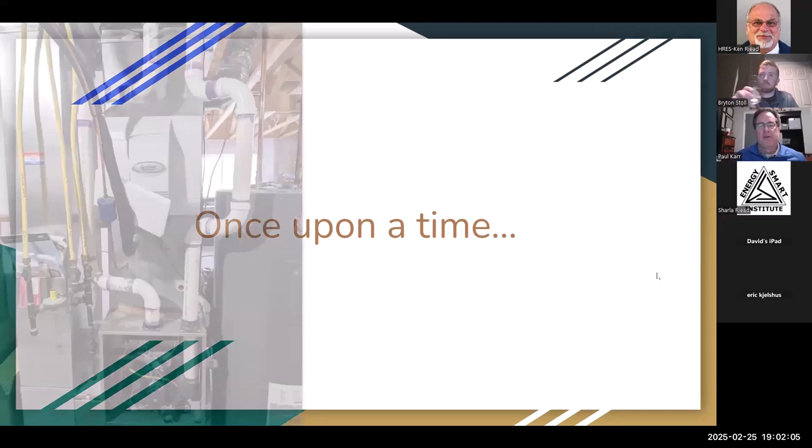So remember the TV show Lost? The survivors had to go and press the reset button right on time, or else the end of the world would come. And so I was like the guy on Lost. I had to go to the basement and kept hitting the reset button to keep the unit running over the winter. And I've got a little video here of the burner firing, so it would fire up nicely, nice blue flame there.

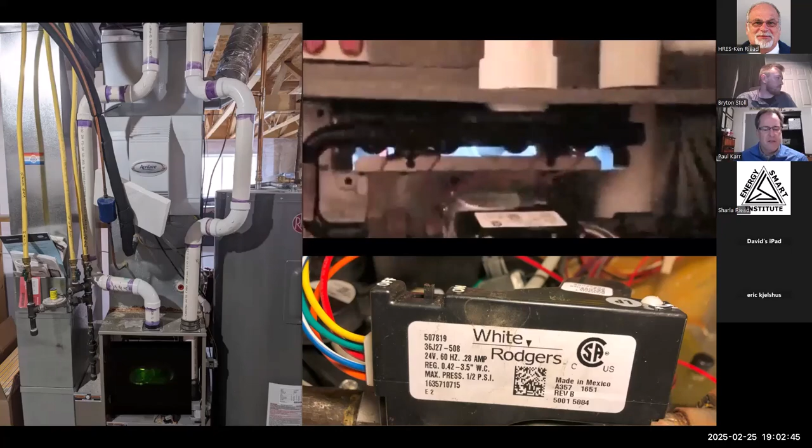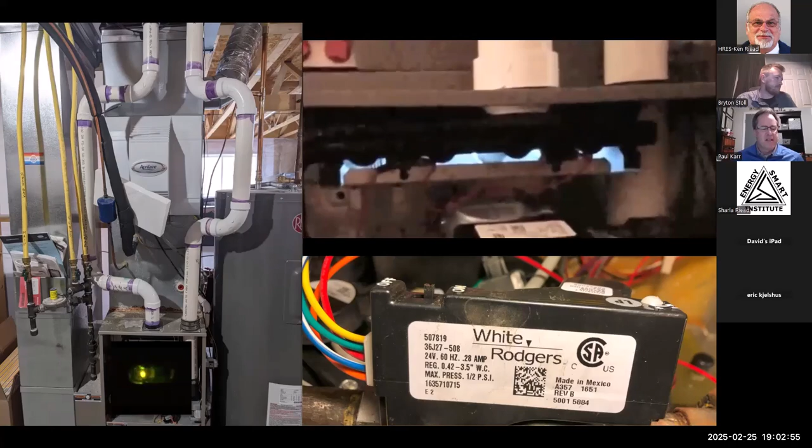I'd call the HVAC technician to come out and take a look at it, and his diagnosis was the modulating gas valve on this brand is well known to be a piece of crap. And you can't really replace it. You need to replace the whole system, and that'll cost you about $12,000. And so that was a shock to the system.

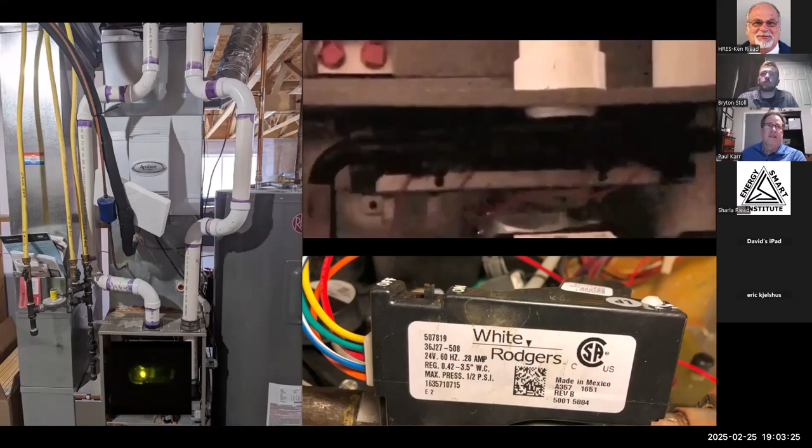And maybe some of you have heard that from a tech before, and you don't know if you can believe them or not. Are they just trying to sell me equipment, or could I actually call someone else out here? Maybe they could fix it. I don't know. But that was way more than I expected. So here you're going to see where the fan turns off and the flame rolls out, then it kicks off. And so that was doing this quite frequently throughout the winter.

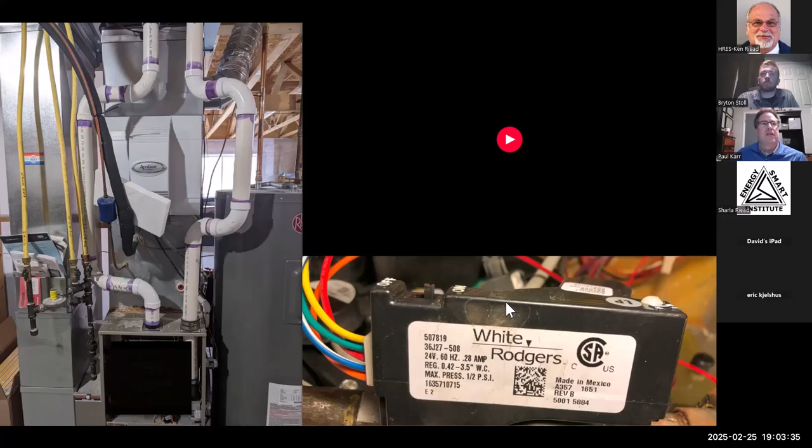So I knew that I didn't want to spend $12,000 on a new system that was just the same as what was coming out. So I thought maybe it was an opportunity to put in something better. In the summers, we had been experiencing really high electric bills, like over $400 to cool the house. And we had become friends with one of the neighbors, the owner of the propane company. We were friends, but still calling him to come refill our propane tank for over $1,000 was always a traumatic experience.

So I asked the first guy, what would it cost to put in a heat pump? And his answer was, oh, I wouldn't do that. He said, heat pumps can't handle our Kansas winters. You'll be calling me in 9 months complaining that it's just too cold. So I said, humor me. So he checked with his supplier because he didn't even know what it was going to cost. And he reluctantly came back with a quote of $22,000.

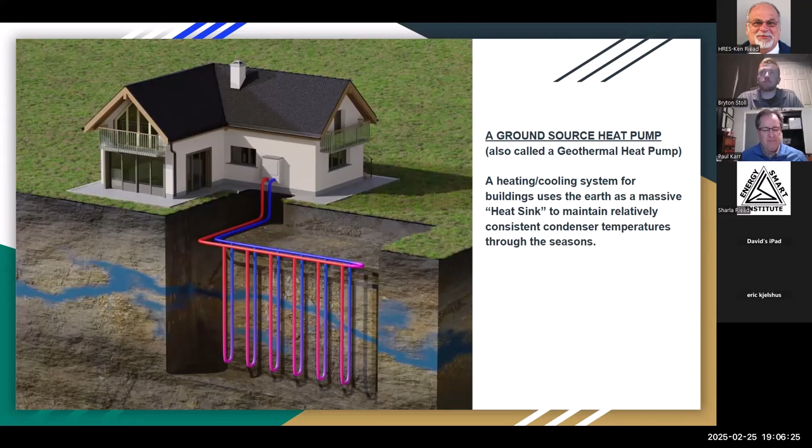So we decided to do that. And we called them out and got on the schedule. Had to wait months for this to happen because they were high in demand. And you have to wait on the weather too. So rainy spring season's not a good time because they got to pull this huge rig out into your yard.

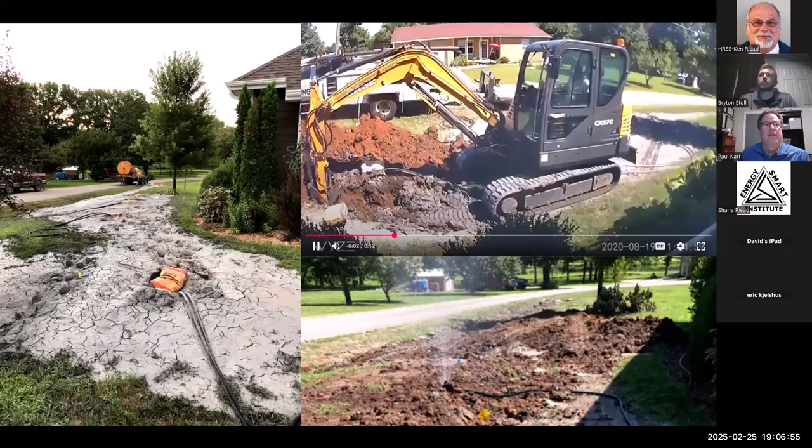And they drilled four wells to the side of the house here. And talk about destroying the yard. They definitely did do that. So I had expected that I would just clean up the mess with my hand shovel, but no, it ended up being a lot worse than I thought. But there you can see on the left-hand picture the four yellow bags. Those were the tops of the four wells that they drilled.

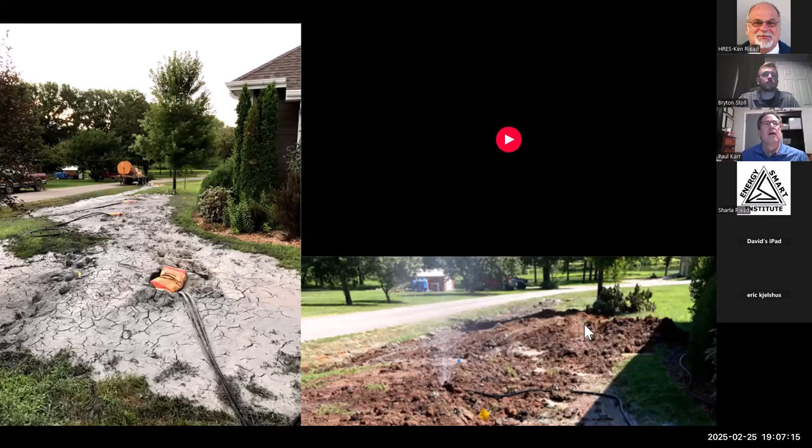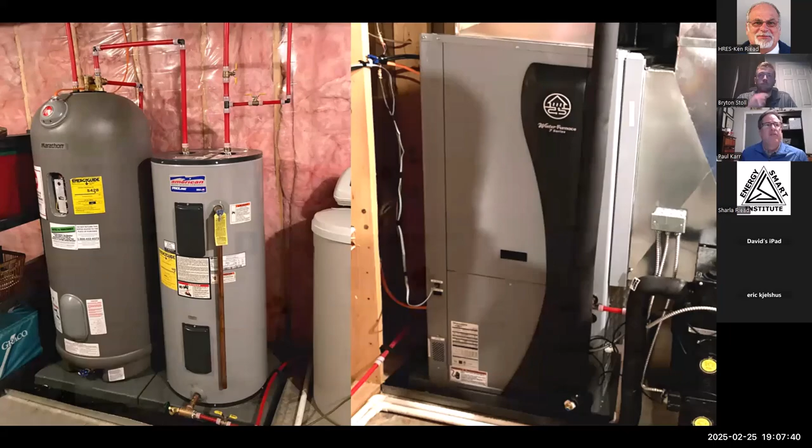And before we knew it, we had our beautiful new WaterFurnace system in the basement, took the place of the furnace, and the little side desuperheater, the heating the hot water on the side, and a new electric tank. And we got it put in. I was very proud of this. Now, we never really saw an electric bill as low as $35, unfortunately, maybe $100. But I still have the inner satisfaction that we made a smart decision.

Now, this screen here is pretty interesting. This was how the system looked. Let me turn on my pen here. So this was, we'd gotten the system put in the fall, and this screenshot was taken on February 16th, and I was worried because this loop temperature throughout the winter had been dropping. It started around in the 50s, but the loop temperature is what the temperature of the loop down in the earth is on those 200-foot wells, and that temperature kept dropping and dropping. And I was worried that at some point we were going to reach freezing.

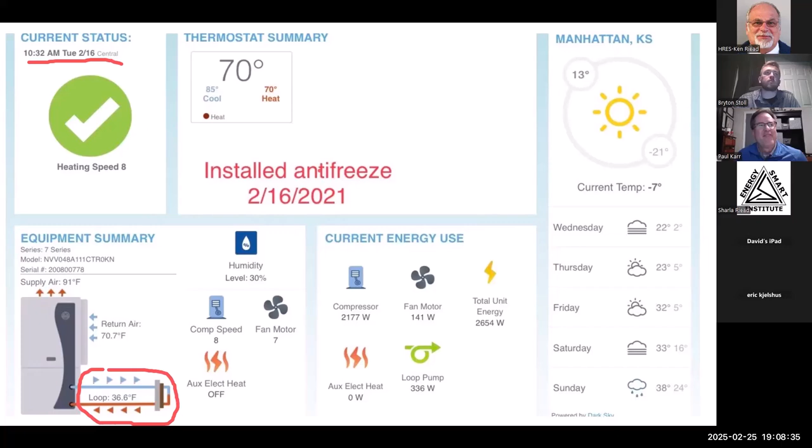And so I had called the installer, and he goes, "Oh, we'll put antifreeze in it. Don't worry, we'll get out there and do it." And they finally came out and did it in February. So that's what this note was. But they installed the antifreeze on February 16th, and this loop temperature never got below freezing.

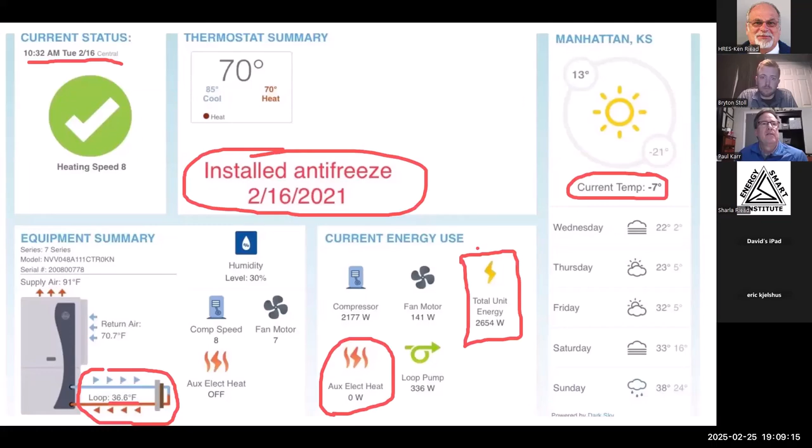Some other interesting things. It was -7 degrees out the day that I took this screenshot. And the electric auxiliary heat never kicked on because the loop temperature was still able to use the heat pump at 36.6 degrees. The total energy being drawn at the moment I took the snapshot was 2,600 watts, which is about 11 amps. So definitely a great energy saver. We're able to heat the house on 11 amps basically at this moment. So that was pretty neat. We were pretty excited about that.

Let's see, how do I turn this off?

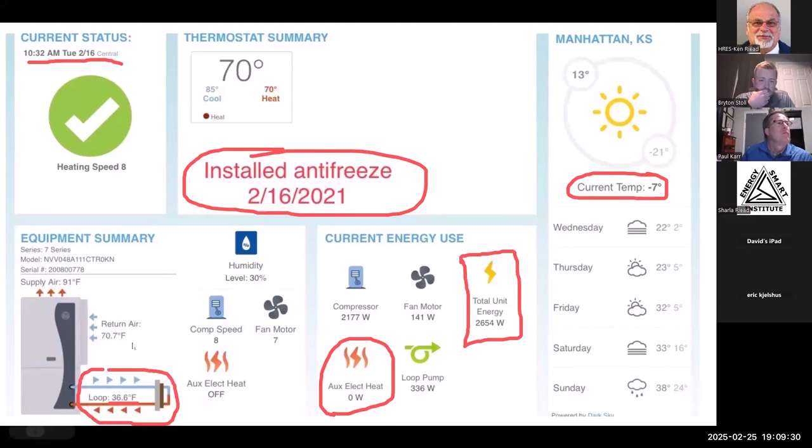So some things I learned from this experience. First, the expected energy savings really was an educated guess based on what my cousin had told me. In hindsight, I should have found an energy auditor to perform the energy model with accurate energy savings predictions and not just rely on anecdotal evidence. So that was one thing I learned. But at the time, I didn't really know anything about energy auditors.

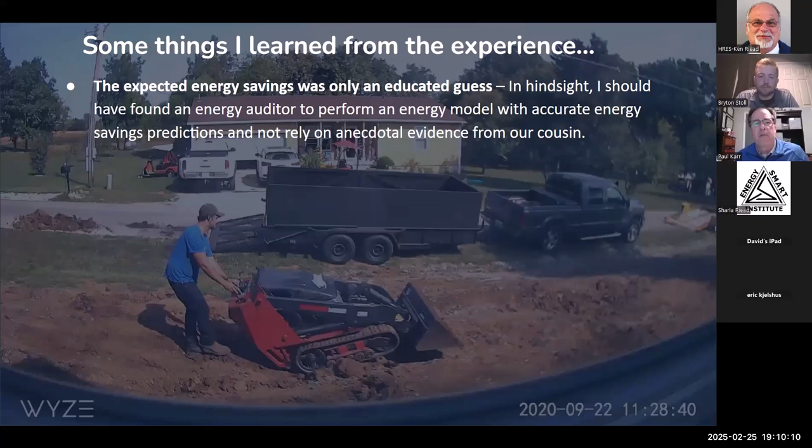Secondly, the buying decision was ultimately an emotional one. And I think if those of you out there who are in sales of any kind, you probably recognize this, that people ultimately make the buying decision based on an emotional decision usually. I used the potential energy savings and the tax credit to justify what I already wanted to do in my gut, but might have done it even if the financial picture didn't pan out. So trust your instincts, but verify. Perform due diligence to make smart decisions for yourself and your families, because not all upgrades live up to the expectations.

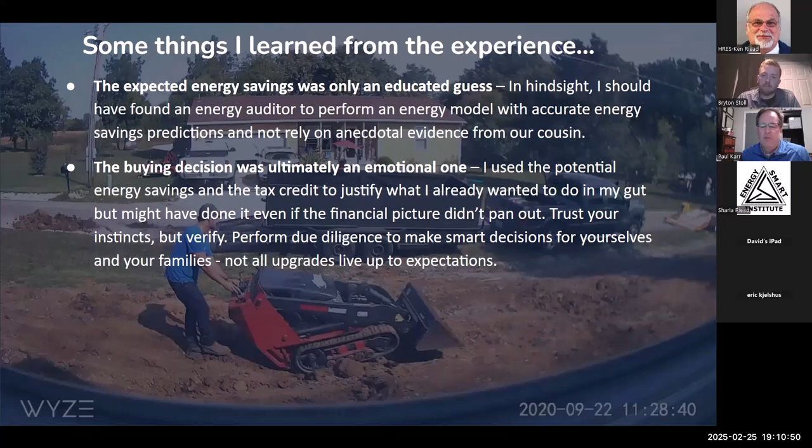Another thing I learned is we sold the house really the very next year. And so the appreciation on the house helped pay for the upgrade when we sold. The 22,000 we spent just sort of disappeared in the mix during the real estate transaction. We sold the house for significantly more than what we originally paid. And analysis don't take into account the general appreciation of real estate value. Investing in your home as a general rule is almost always a good choice.

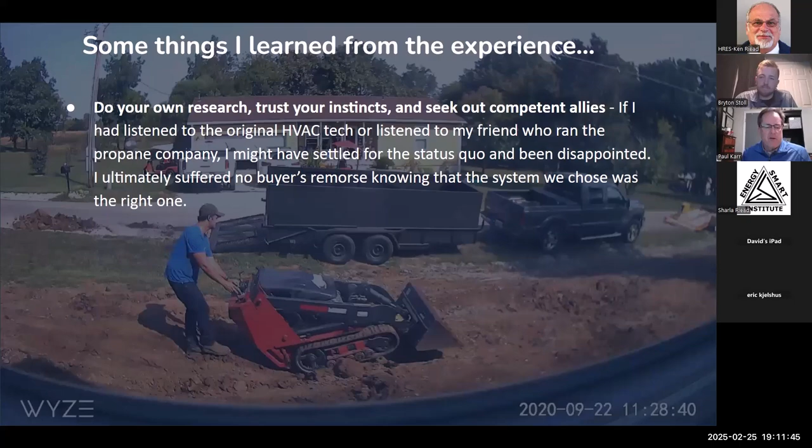Next thing I learned is do your own research, trust your instincts, and seek out competent allies. If I had listened to the original HVAC tech or listened to my friend who ran the propane company, I might have settled for the status quo and been disappointed. I ultimately suffered no buyer's remorse, knowing that the system we chose was the right one.

And maybe the last thing I learned is that doing the right thing can be hard. Changing the system, drilling wells, waiting for contractors, even repairing the landscape, and then having to apply for the rebates and tax credits after the fact was a lot of work, but it was also a lot of fun. And those of you on this call probably enjoy this kind of stuff as much as I do. So even though it's a lot more work, it's fun, so go for it.

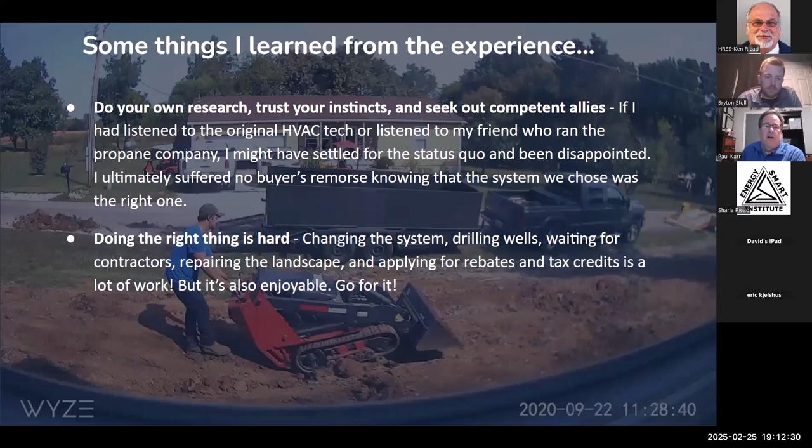So that's what I learned about that experience of installing the ground source heat pump system. And I used the tax credit to help pay for it. So let's talk about the tax credit specifically. Bryton, you want to take it from here?

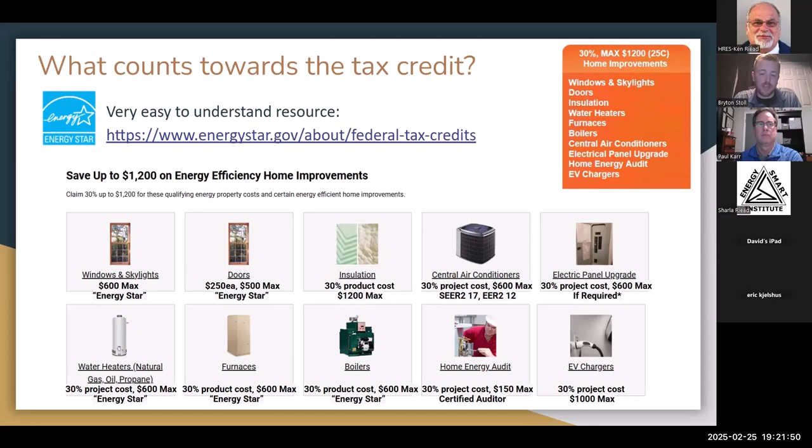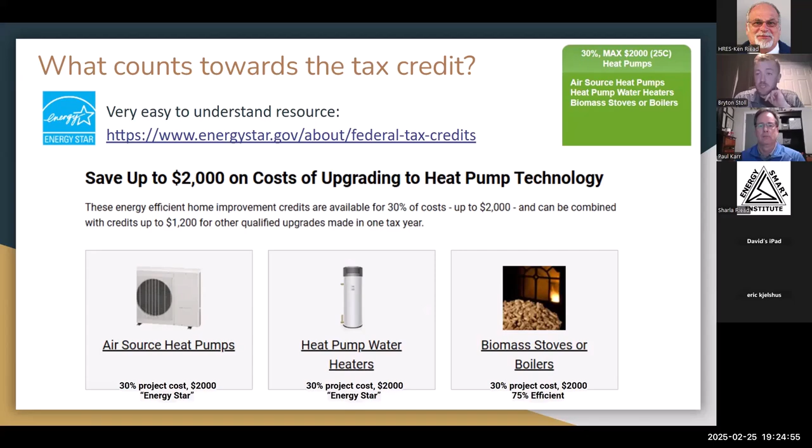Generally, those are being installed by the same folks that are doing solar panels. Maybe not always, but generally those are being done by the solar panel folks. So the good news is they understand the 25D tax credit.

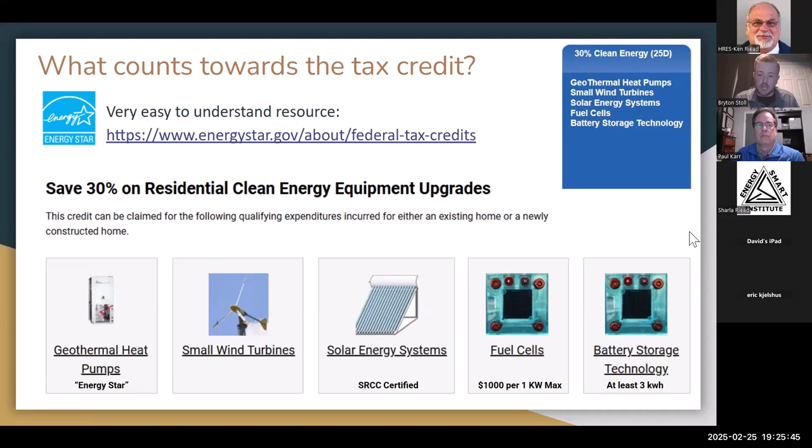So let's go on to the forms. I don't necessarily think we need to bore you and go through this really slowly. Hopefully either your accountant is doing this or you're using TurboTax or Free Tax USA. If you're doing those things, it's going to fill this form out for you. But let's go through it real quick, just so that you understand how this actually ends up on your income tax return. So here you got the 1040. That is your overall income tax return.

You'll see there under tax and credits, that is where you're going to put the number that says this is how much credit I got from my 25D and my 25C credits. So I think you start with Form 5695. That's for energy efficiency tax credits. You take a number from there and put it on Schedule 3, and then you take the number from Schedule 3 and put it on 1040.

Yeah, so let's move on to the next one here. Oh, there you go. There's specifically the energy efficiency ones going on that Schedule 3 of the 1040. I would like to get down to 5695. That is the residential energy efficiency tax credit form, the really exciting stuff here. Again, if you got an accountant, let them handle it, or your chosen software. But this is how it ends up working.

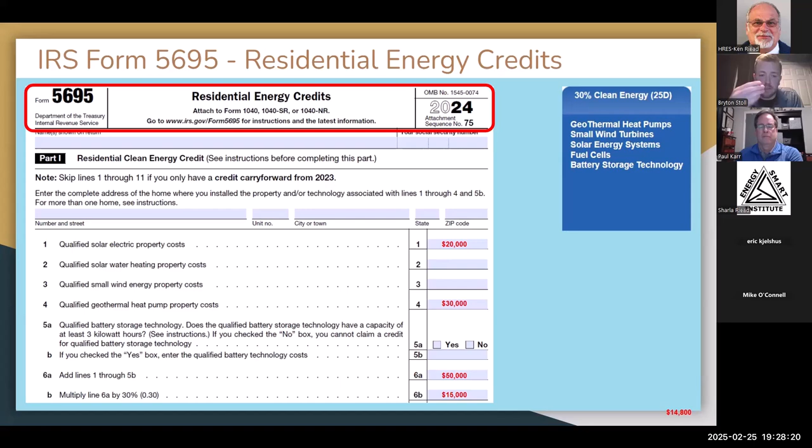So the first portion here, the part 1, that's 25D. That's what we just talked about. That is the 30% tax credit, no cap. This is solar panels, geothermal, batteries. And you'll see right there, we just spent $20,000 on our solar panels. We spent $30,000 on our geothermal heat pump. And you'll see that this one does not have a maximum. So we spent $50,000 total. We can get 30% of that $50,000 back. So we get our $15,000.

This is kind of a continuation of the same thing here. You go down. Did you buy solar? Did you buy fuel cells? Did you buy geothermal? In our example here, we ended up with $15,000. I believe the residential clean energy credit limit, correct me if I'm wrong, Paul, but the point of this form is to figure out if you are getting down to 0 taxes.

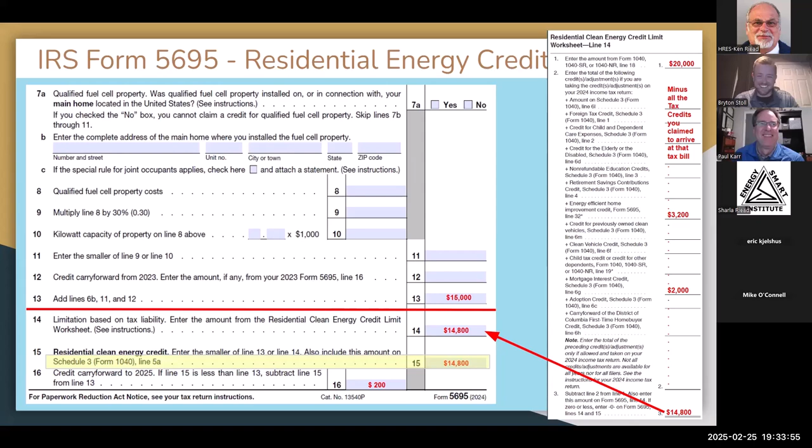or system. And so I've talked to insulators who will say, we're putting in an insulation system. And so they don't necessarily itemize their invoice. You just get charged, say, $5,000. So that includes labor and materials, but they're calling it an insulation system. So this is a case where definitions of what words mean probably comes into play there. And again, we are not accountants or lawyers. This is not legal advice.

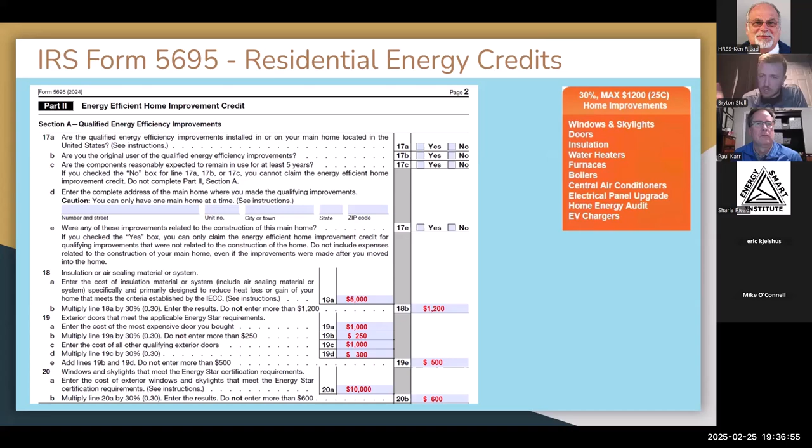You see the windows there. We spent $10,000 on windows, but you can only get $600 back maximum. So, off to the right side, basically we're maxing out all these tax credits. Spent $6,000 on an air conditioner. $600 max on the air conditioner. Spent $5,000 on, we really went to town on this house. This is nice. So again, we're hitting all of those category maxes on the right column. 600, 600, 500, energy audit, 150.

But when we add everything up, add all those lines together, all those maxes, we get 4,250. That is the theoretical amount that we could get. No, we can't. The maximum is 1,200 for this bucket. So you'll see there, it says, add all the lines together. We got 4,250, and then it says, take that number or $1,200, whichever's smaller. So $1,200.

Now, once we get to line 28, we're through that second bucket, that 25C, the hodgepodge bucket. And now we're on to the third bucket, 25C, the heat pumps and heat pump water heaters and biomass stoves. So we spent $6,000 on this heat pump water heater. We've maxed out our tax credit of $2,000. And so we maxed out the entire max of 25C, again, the total of 3,200.

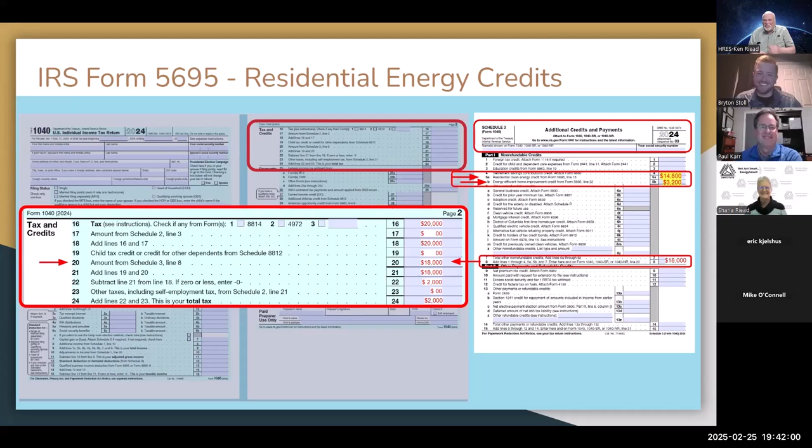The software we use also does utility bill calibration. I'll talk about that in specifics a little bit later, but it uses the actual energy that the house used over a 12-month period and calibrates the model to that, so it makes it more accurate. And some of the rebate programs coming out from the federal government are going to require these BPI 2400 calibrated models for those rebates.

The audit should calculate the savings, show accurate monetary savings, carbon dioxide savings, perhaps, for different upgrades that you might do on your house. So if we're going to add X amount of insulation, how much money is that going to save us? Combustion appliance testing. When we go into a house, we'll do carbon monoxide testing, and the audit ought to include that in the reporting.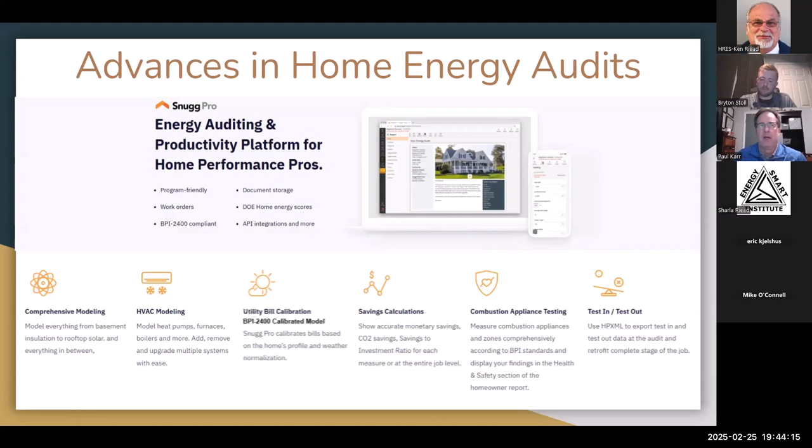Test in and test out procedures. Maybe we go into a house and we test in, say here's what the numbers were when we tested in, and then after we completed the improvements, we tested out, so we could actually calculate how much the energy model actually improved after we made the adjustments. So those are all things that we want to include in the energy audit.

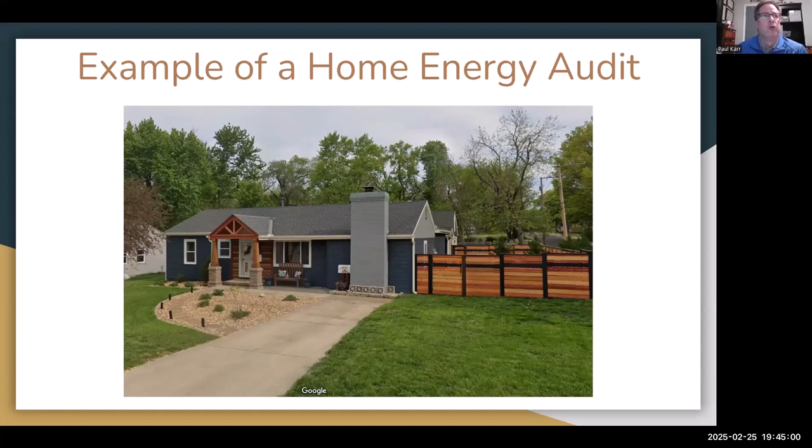So an example of an energy audit. Say we get a call, someone wants us to come out and do an energy audit, they give us the address of the house, and we set up a time. First thing I do is go to Google and take a look at the house. This house looks like a typical suburban house in an older part of Overland Park, for example. Looks like just a ranch. In this case, there was a driveway that goes up to a fireplace. So I know right away this house probably got a remodel where they converted the garage to a room. So that's kind of interesting. But it looks like a pretty plain house.

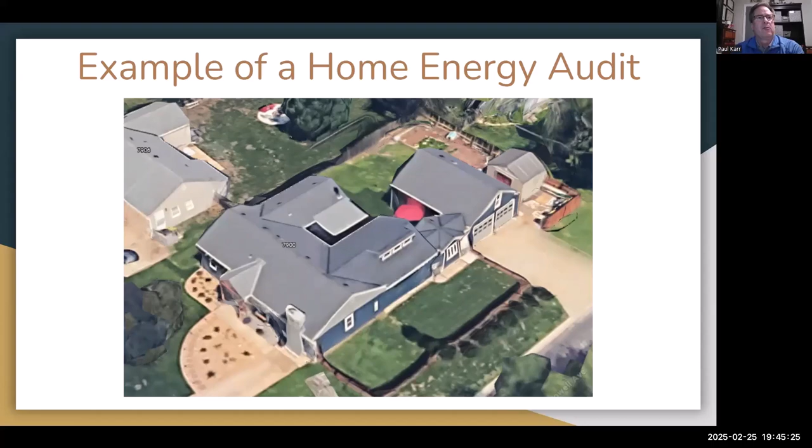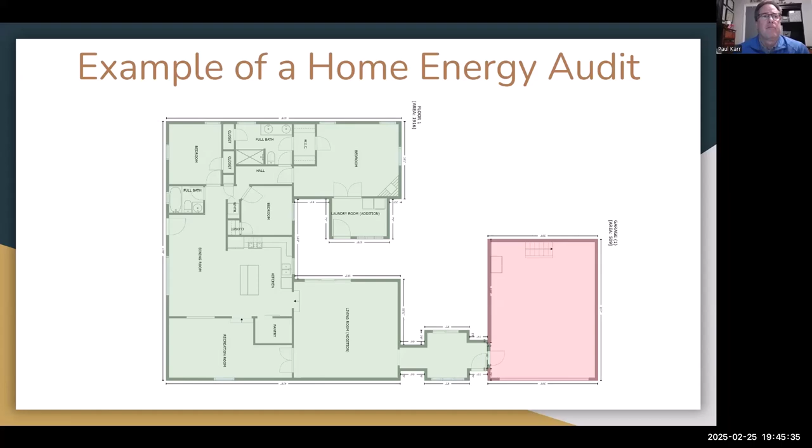But I'm going to zoom out, sky view, and this house is a lot more complicated than you might have thought from the front view. So I'm making notes in my head like, oh, there's a detached garage on the back, a different driveway back there, but it's connected to the house. There's a couple different additions. So I realized this house is a little more complicated than I thought. We're going to go out to the house, measure it, and create a dimensioned floor plan.

And with that, we're going to create a 3D model. So we use SketchUp in our office to create 3D models. It helps us to calculate what are all the areas. So how much wall surface area do I have? How much attic surface area do I have? How many vaulted ceilings do I have? And what is the surface area of those?

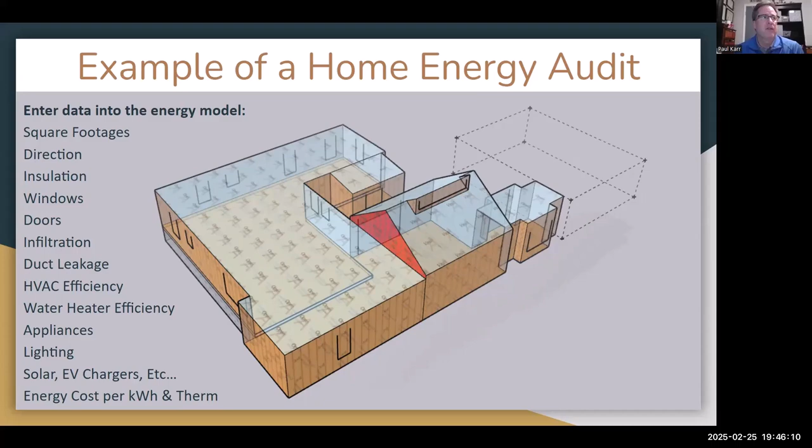How big are the windows? What direction is the building facing? Because it makes a difference which direction the sun is coming in. We do a blower door test to figure out how leaky the house is. We can test HVAC efficiency. Here's an example. We'll crawl up into the attic and see how much insulation is up there.

And I'll just give you a little quiz. What's the R value of that insulation in that attic? Say I stuck a tape measure down in a random place and I measured 12 inches. What do you think the average R value of that attic is? It's a little hard to say, isn't it? So it's thicker in some places, it's shallower in other places. We've got some gaps here and there.

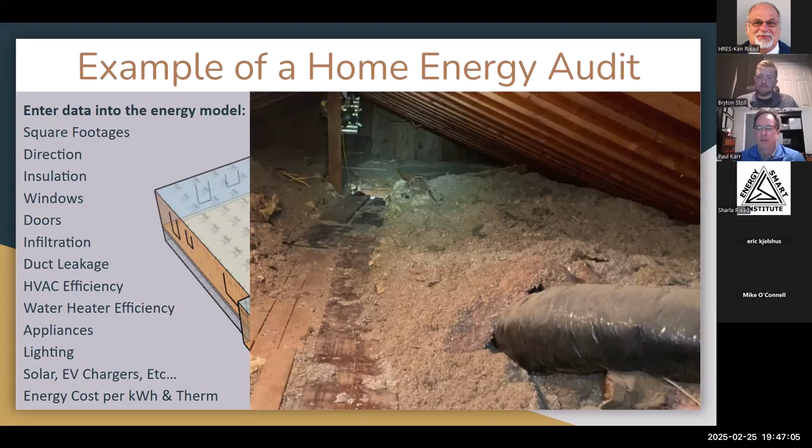So as the auditor, what we do is we try to figure out what is the average. So I'll take measurements in several different places, and maybe I decide, well, it was R30 in some areas, or R20 in others. So I'm going to say it's maybe an average of R25. And this is where the utility bill calibration really helps us. I'll explain why later.

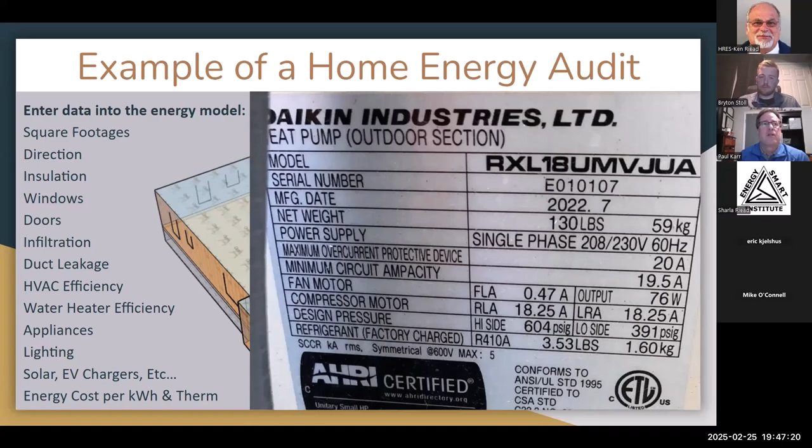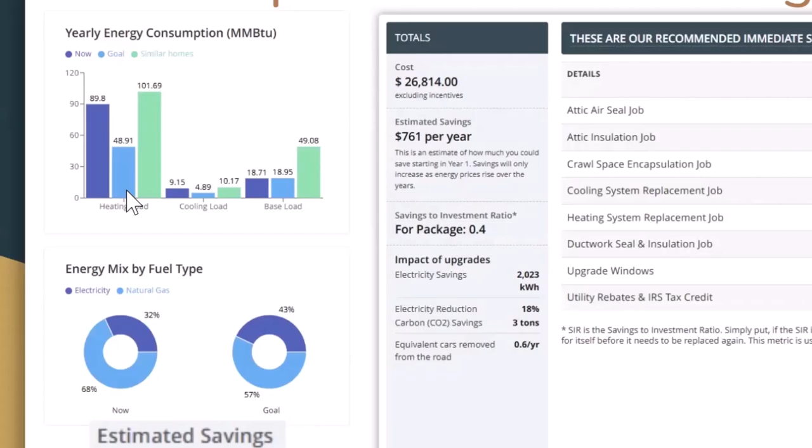So the dark blue is what the house is doing now, and the light blue is what our goal is after we make modifications to the house. So everything here on the right side, these are the 8 or 9 modifications that we're recommending. So we're going to say for this house, we think you should do an air seal job, and that may cost you around $2,250, and it's going to give you an annual savings of $79.

So the energy model is telling us if you improve the attic insulation from R25 to R49, this is how much energy savings you can expect. I'm sorry, that's for the air seal. If you do the insulation, similar, and so forth. So you go through all these, we estimate about what we think it'll cost and what the energy savings will be. So in this case, the estimated savings for all of this stuff is going to save you $761 per year. Okay.

So remember when I showed you that picture of the attic and the insulation was not uniform, and we said our best guess was R25. Well, the walls are the same way. We might guess that it's 2x4 construction. It's probably R13, and we might plug R13 into the model. But there's probably lots of gaps here and there. Maybe there's places where it was never insulated at all, but we can't see because we don't have X-ray glasses.

Now we can. There's ways we can kind of peer into the walls using thermal cameras, but in general, it's not a perfect R13. Same thing with windows. We can take our best guess at what the U values of the windows are, and so forth. So this is why we like to use the utility bill calibration and help the model calibrate itself. So this is an example of what the Evergy bills were for 12 months at this house. And we're able to plug those numbers into the energy model.

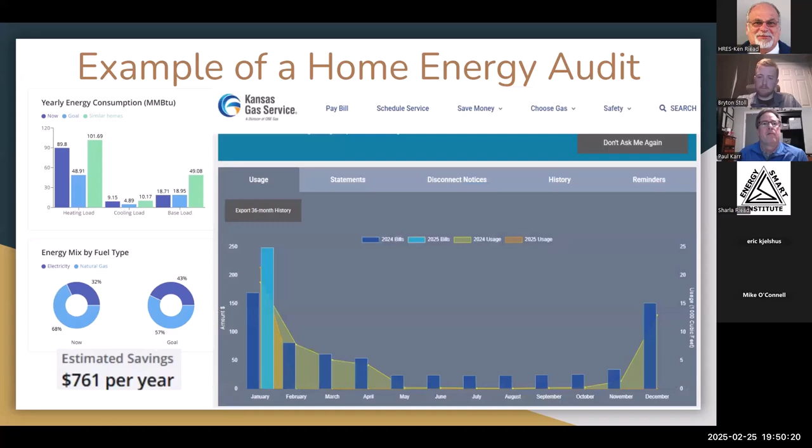Same thing for the natural gas. And keep an eye on that $761 per year. The new model, after calibrating, we're only going to save $528 per year. So it kind of hurt us, but it hurt us in a good way. It's giving us more truthful, more accurate information.

So a lot of times you'll hear people say, well, we made all these improvements for the house, but we didn't get the energy savings we thought we were going to get. And this is part of the reason: the energy models aren't perfect. They're modeling it as best as they can, but there's just deficiencies that the auditor can't see. And so this helps to calibrate the model.

It also helps calibrate for how the family operates the house. Maybe they don't turn the thermostat down that far in the summer, so they're saving energy by keeping the thermostat hot. You can't model that without knowing how they operate it. Maybe it's a family of 8 kids and they're running laundry constantly every day, so that's going to increase your energy use. You can't model that without knowing those things. So the energy bill calibration helps us a lot.

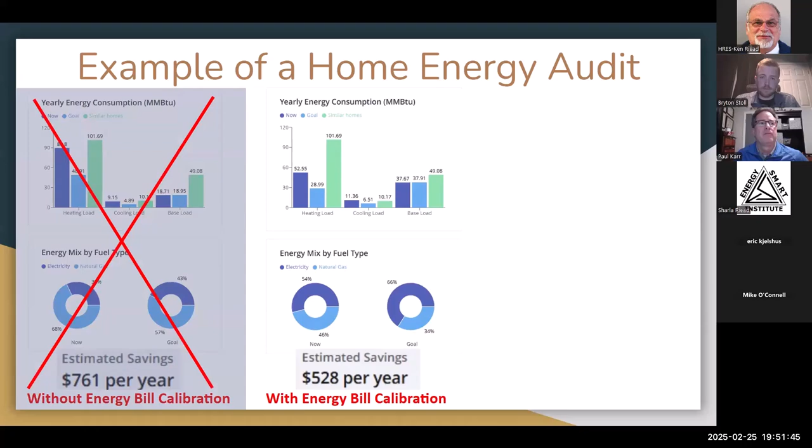So here they are side by side. Without calibration, we were going to save $761 per year. With energy bill calibration, we're only going to save $528 per year. So we're going to throw that one out and use the better number. Okay. So let's go back to more specifics here.

So in the attic air seal job, we're going to seal the attic, all the penetrations of the ceiling. We had a blower door number on this house, and we were going to have a goal of improving it by 50%. The attic insulation, we're going to vacuum it all out, number one, so we can air seal the ceiling better. This house had an attic fan. We're going to remove it completely and seal that opening shut. And that'll let us seal everything and then blow back in a new, fresh, uniform layer of insulation that's a good R49.

This house has a crawl space. We're going to encapsulate that crawl space, so that's going to help us on our blower door also. And we're going to insulate those crawl space walls. The cooling system and heating system, we're going to replace the existing gas-fired furnace with a high-efficiency gas-fired furnace and we're going to replace the 13 SEER AC with a 16 SEER.

Okay. We're going to seal the ductwork better and insulate it better. So we had ductwork in the attic and in the crawl space. We're going to seal it and insulate it. We're going to upgrade the windows. And then we're going to take all the utility rebates and tax credits we can. And that's what all these numbers are adding up to being our $26,814. And the approximate savings, this total column here, was the 528. Okay.

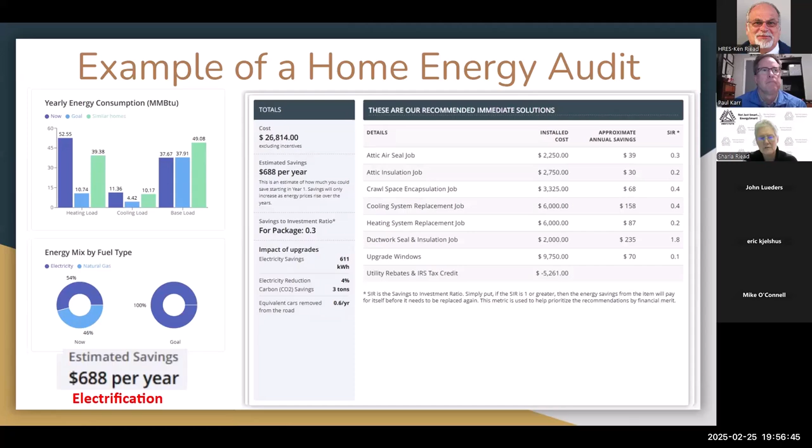This particular model is based on putting air handlers in that encapsulated basement and ducting to floor registers in the house and getting rid of the unit that was in the attic so it can be air sealed better. And then that total cost is excluding incentives, it says, and you've got over $5,000 in incentives you're showing there. So that helps too. Yeah.

And the stove, would you recommend like an induction stove, or would you recommend just a resistance stove, or a stovetop with induction? I would have a conversation with you as the homeowner, encourage you to try out induction. I've heard great things about it. Some people I know that have used them say they would never go back. They love them. They do cost a little bit more, but they just have lots of advantages, not just in cooking and in electrifying, but it's also safer because a child can't burn themselves by touching the surface, things like that. And you can really control the temperature extremely well.

Mm-hmm. And there's options there. I've also seen just induction countertop stoves. You could try them out before you invest in the whole ball of wax, see if you like it. So there's that too.

One thing I just wanted to pipe in and point out a couple things about Paul's energy audits here. I've done some research on other ways to get energy audits done, and also load calculations too. If you're an HVAC guy like Eric, you'd be happy to know that this thing will spit you out a load calculation as well. It's not an official Manual J, but it will tell you how big of an HVAC system your house needs.

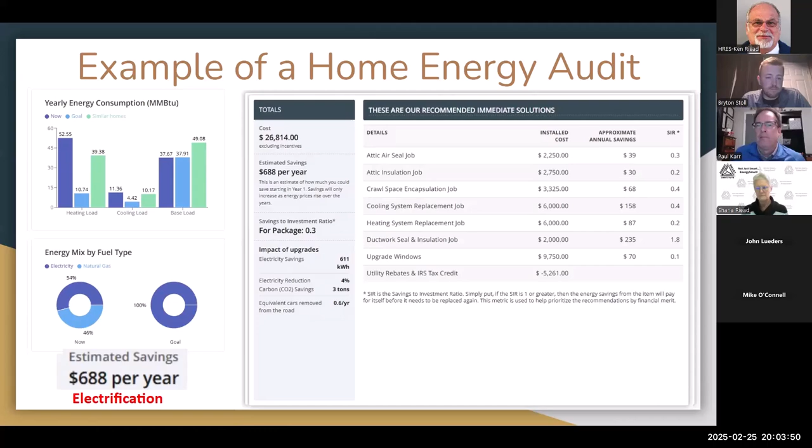Thanks for the questions, John. Anyone else? Everybody's quiet now. All right. Well, thank you very much, Bryton and Paul. I got a lot out of that. I really did. That's what we'd like to hear. You're welcome. Well, that was a lot of information. Thank you so much. I had the question earlier about the carry forward on the tax credits, but you answered it. I was learning some of that stuff myself. Well, it's complicated, really, but if you use it a lot, then it gets less complicated.